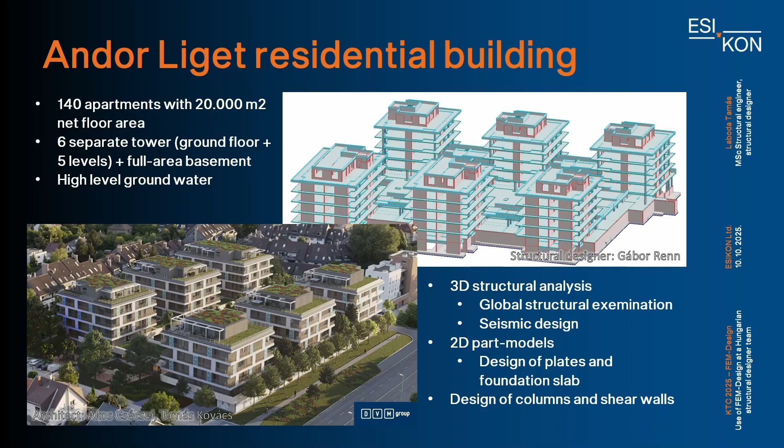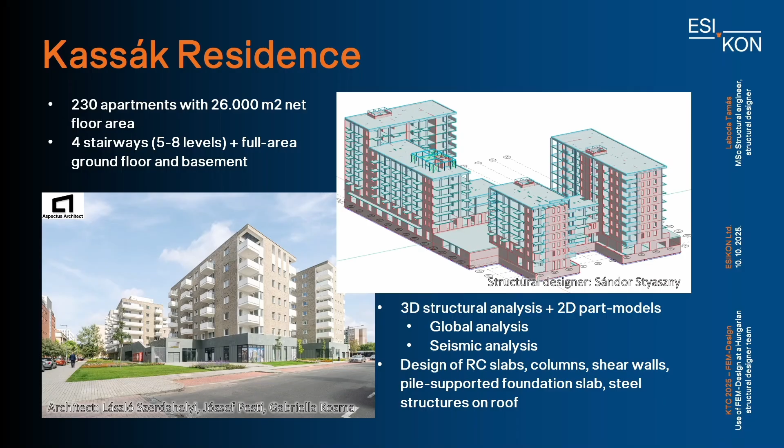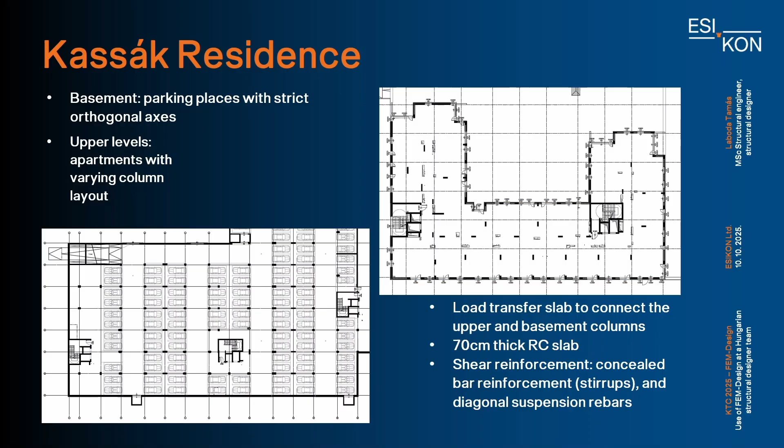As you can see on the left side picture, it is the layout plan of the basement level. It has a strict orthogonal column layout to have the parking function. On the right picture, you can see the plan view of the upper floors with residential functions. Here, the columns were located inside the separating walls of the apartments because, of course, nobody wants a column in the middle of the bedroom. So it is a varying column layout. As you can see in this section, the column layout is very different on the basement levels and the upper levels, and it would be an impossible task for the architectural designers to align these columns.

So we came up with a solution, which is a thick load transfer slab located above the ground floor, a 70 centimeter thick reinforced concrete slab. The base idea was to make another foundation slab above the ground floor, so the varying layout columns from the upper side are supported by this slab, and the columns in the basement act like strict layout piles.

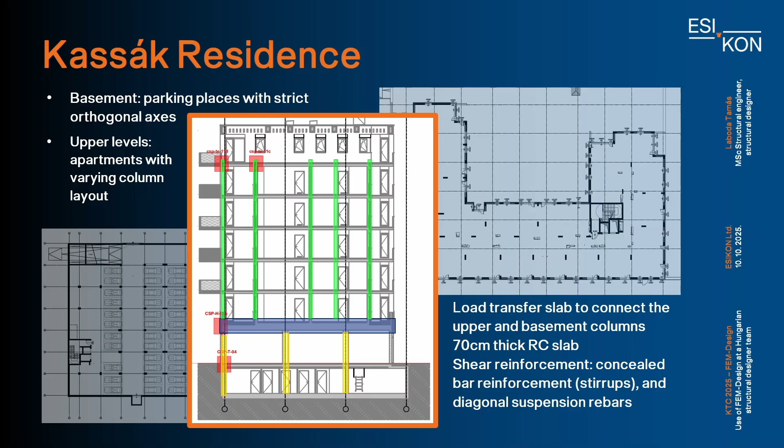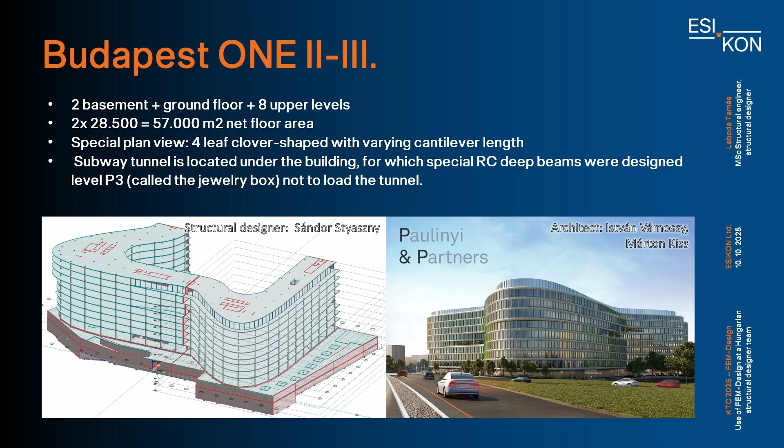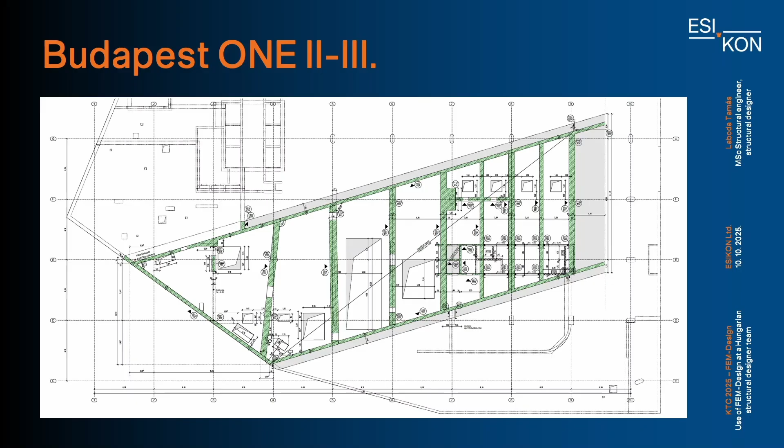On top of the structural form, we had to solve a special foundation problem. One of Budapest's subway tunnels will be located under the building. So as a solution, we had to design some reinforced concrete deep beams under the building on level P3 to protect the future tunnel from the loads of the building system. That reinforced concrete box is named by the architects the jewelry box.

One of our bigger projects is Dürer Park Office Building 2, which is located in Budapest near the City Park. At the end of the 19th century, a nunnery was built here. It was functioning as a school for disadvantaged students, and the nunnery had its own chapel, not only for the students, but open for everyone.

After the Second World War, Hungary became part of the Soviet Union, and religion became undesirable. The Communist Party transformed the building, not respecting its past. And through time, the condition of the building was seriously damaged. Our project was to renovate the original building and integrate it into a new modern office building.

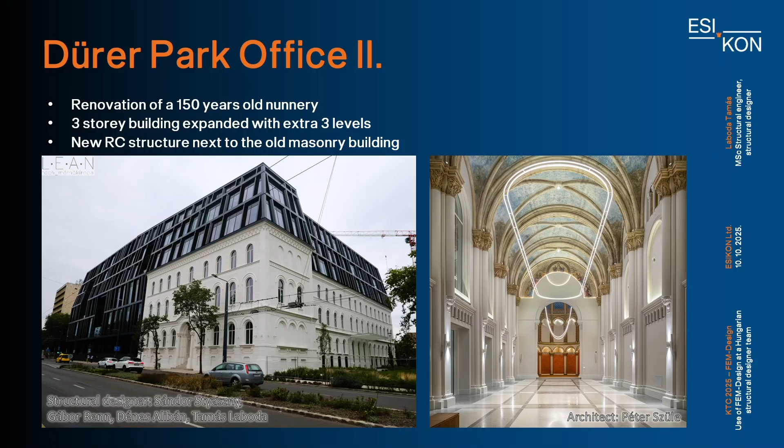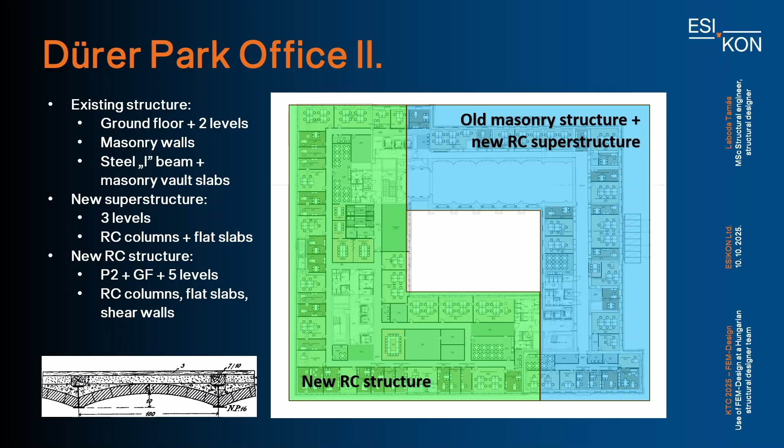On top of this old structure, we had to design 3 extra levels with regular reinforced concrete structure, columns, shear walls, and flat slabs. As an extension to the building, a new reinforced concrete structure was designed, marked with the green area. It has 2 basement levels, a ground floor, and 5 upper levels.

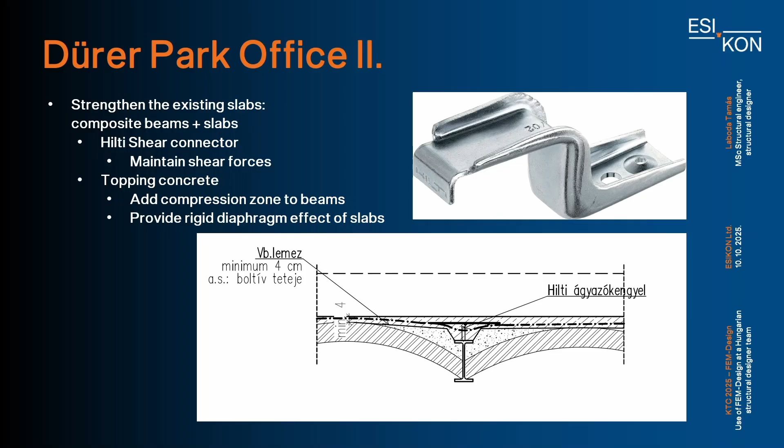During the design, we had to strengthen the existing slabs. We made it with topping concrete. Between the concrete and the I-section beams, we used Hilti shear connectors to maintain the shear forces. And the topping concrete not only ensures the compression zone for the beams, but also integrates them into a rigid diaphragm for the bracing system.

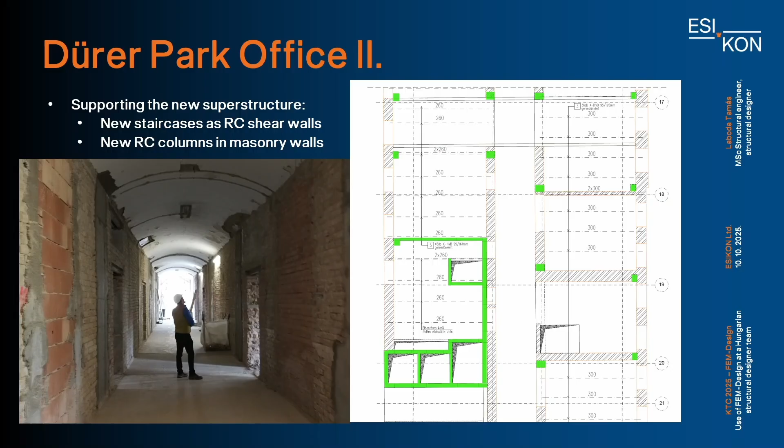The masonry walls didn't have so much extra capacity to support the additional 3 levels, so we had to design additional reinforced concrete columns integrated into the original masonry walls to support the superstructure. The columns are transferring all the loads from the upper levels to a new strengthened foundation.

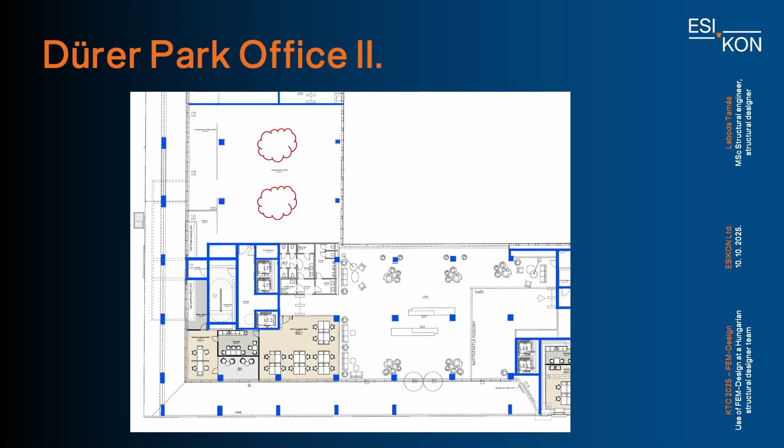There's a common phrase often told by architectural designers that from every building you can remove 1 column and the building remains stable. Now, we put that phrase into reality. We removed not only 1 but 2 columns from the ground floor. The building originally has an 8 by 8 meter column layout, but by the conference hall on the ground floor, 2 columns were in the wrong place. You can see it marked with red. So we removed them. How did we do this?

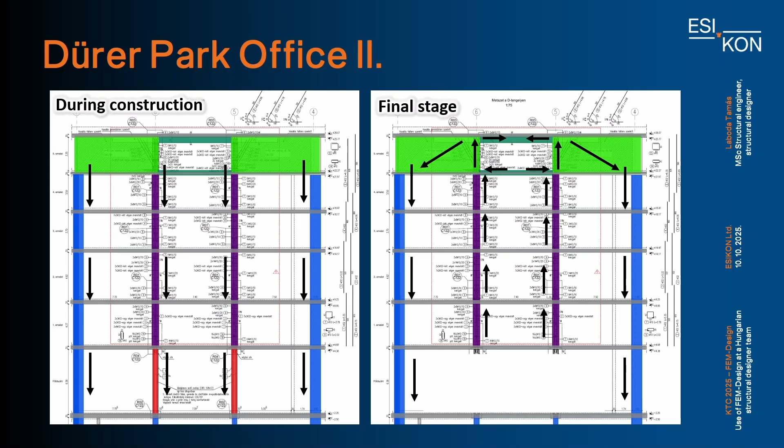So after the structure was finished, we simply cut out the steel columns marked with red on the left-hand side. With that, the top deep beam started to transfer the loads from the middle to the sides to the compressed reinforced concrete columns. And the middle columns, marked with purple, became tensioned and tied up all the slabs to the top load-bearing structure.

As I mentioned at the beginning, we also designed precast reinforced concrete structures, buildings and elements too. The latest development is the use of precast concrete sandwich wall panels as facades for new buildings. I know in Scandinavian areas it's widely and commonly used, but in Hungary we are not so familiar with that structural form now.

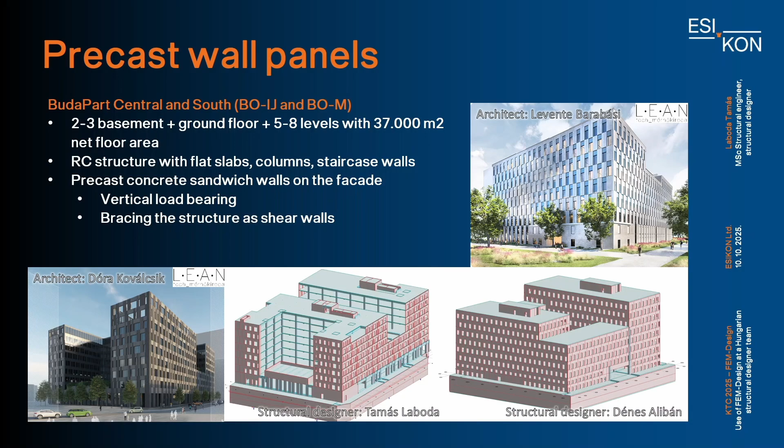We have designed two office buildings located in the BudaPart area, which is the most developing part of Hungary. We designed not only the reinforced concrete main structure, so the slabs, columns, beams, and the staircases, but we delivered shop drawings for the facade elements too. The wall panels act not only as vertical load-bearing elements, but they are part of the bracing system too.

Some words about these panels. They have a 7 centimeter thick outer shell with a special textured Reckli surface. The walls have a 20 centimeter load-bearing inner core. And between the concrete layers, 16 centimeter thick rock wool insulation can be found. The maximum dimensions of the elements are 5.4 by 3.8 meters. It's limited by road safety regulations. And the weight of the panels is 10 to 11 tons, which is limited by the tower crane capacity.

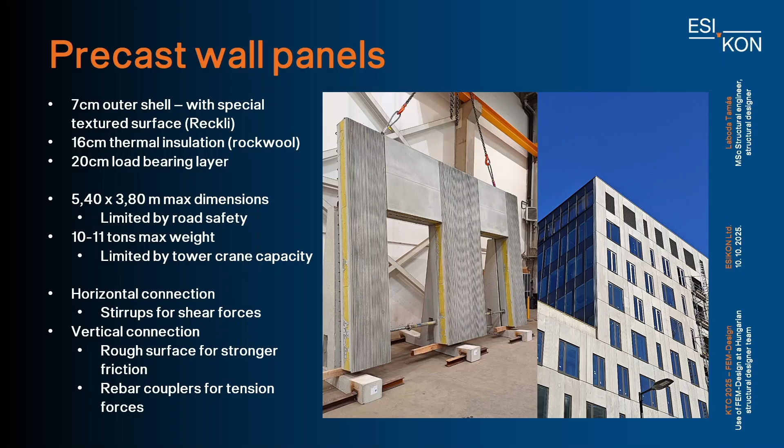The horizontal connections between the panels are made with stirrups and on-site pouring to ensure the maximum shear force between the elements. And the vertical connections are made with roughened surfaces for stronger friction between the elements. Tension forces were handled with rebar couplers between the parts.

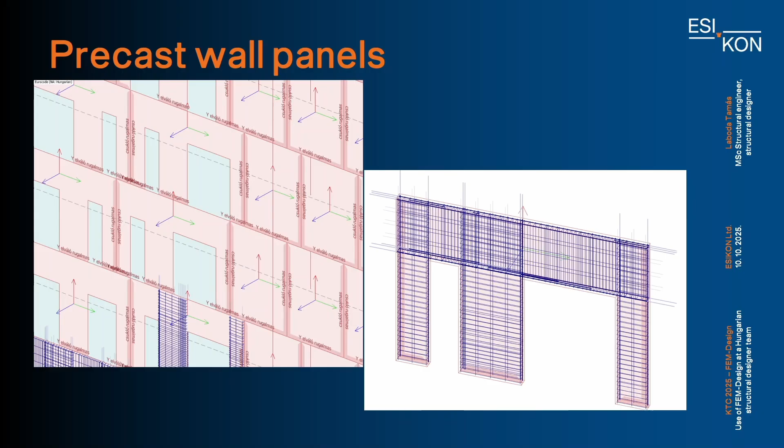Here are some pictures of the FEM-Design model. On the left-hand side, you can see that we used user-defined edge connections between the elements. And on the right-hand side, you can see we made the reinforcement with concealed bar elements.

We also designed precast concrete buildings for the industry. One of our greatest projects was the Central European Logistics Center in Eger. The monumental construction included 8 buildings with 140,000 square meter net floor area. The longest building was the main corridor for the conveyor belt, which is 800 meters long. And the highest were the 2 high bay warehouses with 40 meters height.

All the structures were designed with the help of FEM-Design, not only the 3-dimensional analysis and the seismic design for DCM category, but we checked the concrete elements itself and designed additional steel structures with the help of the finite element model.

Our team delivered the structural design for a building for the new BMW plant in Debrecen. The building has a canteen function where 1,500 people can eat every day. We delivered the documentation with design and build process, so we had to do the works very quickly.

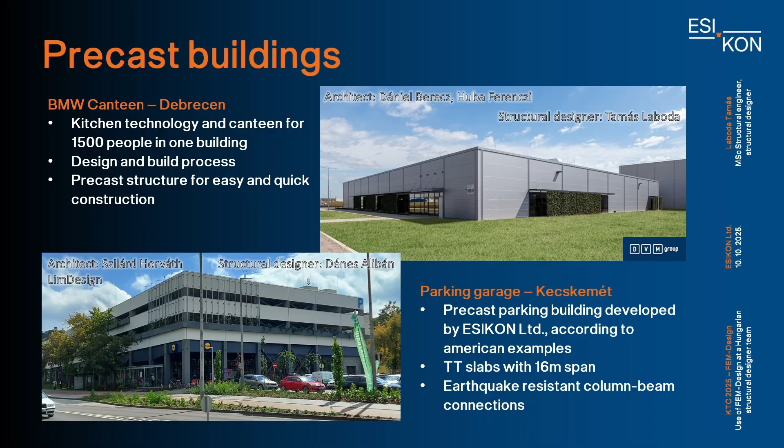Based on American samples, our company has developed a precast parking building system. In Hungary, 2 buildings have already been constructed with this structural system. A ramp parking structure is made of double T-panels with 16 meters span. And the columns and the beams have earthquake-resistant connections, so no additional shear walls are necessary for this type of structure.

We also design steel structures with the help of FEM-Design. On the left picture, you can see a swimming hall. It's in eastern Hungary, Kazincbarcika. The bracing system was made from steel structure, and the roof trusses with 42 meter span were designed with the help of FEM-Design.

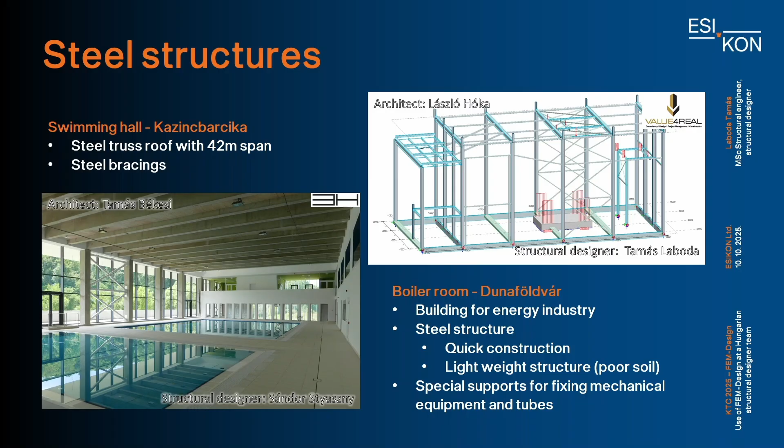On the right picture, you can see a FEM model of a smaller boiler room for the energy industry. We chose the steel structure here because the soil has a poor load-bearing capacity, and we had to reduce the dead loads. It was a pleasure and a fun task to design the fixing of the mechanical equipment and tubes inside this technical building too.

Let me tell you a few words about how we use FEM-Design. As a structural designer, we had to build 2 models, a calculation model in FEM-Design, a FEM software, and a geometrical one in the CAD software. That doubles the work. So to speed up the process, we often communicate with the architectural designers in IFC format, which is exported from FEM-Design itself.

During the design, we have to work with other structural designers like geotechnical engineers or precast concrete manufacturers. And with the help of SAF format, we can exchange data and share models between the different finite element softwares. During the design, we can accelerate our workflow with IFC import. So if we get the geometrical data from the architects, we can import it to FEM-Design and speed up the model build process.

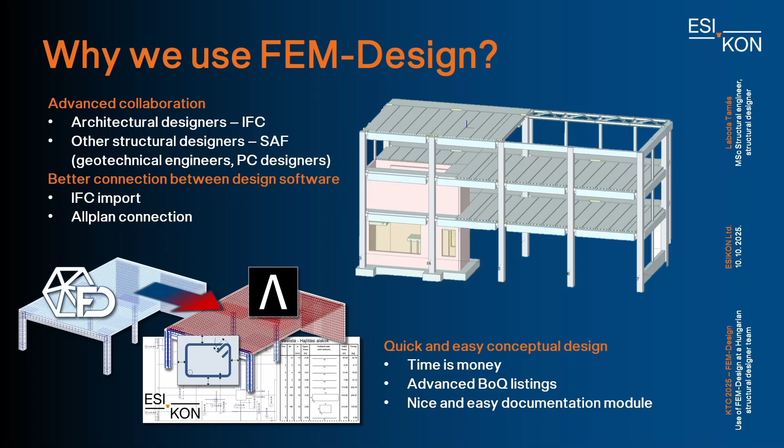And when we're done with the design, we can export the reinforcement with the help of the Allplan connection. So the work is done mostly in FEM-Design, and we only have to add some details to the rebars in Allplan.

We are always looking for the most efficient workflow. In the past, we computed the reactions and internal forces in FEM-Design, but we summarized these reactions and internal forces and took them to another software. We did the detailed design in another software. Separately, in another workflow, we made a 3D geometrical model in a CAD software with the reinforcement. So there were a lot of company standard process descriptions for the colleagues to learn what software, what data transfer from one software to another.

Now we managed to shorten the design flow. We prepared the 3-dimensional global structural analysis in FEM-Design. We designed the main structures with that model. For example, the flat slabs, the beams, the columns are reinforced there. But now we use some other detailing softwares too, for example, for the footing design. With the help of the Allplan FEM-Design connection, we can export the reinforcement and add some detailing to the drawings there. That's where we are now.

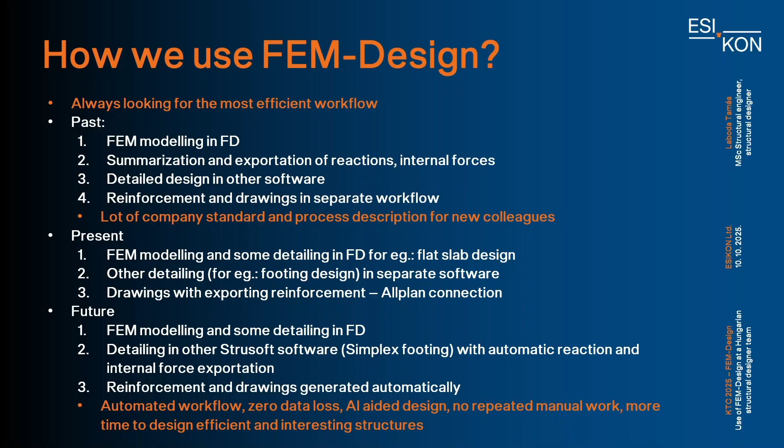That means automated workflow, zero data loss, maybe some AI-aided design, and no repeated manual work, so we will have more time to design efficient and interesting structures.